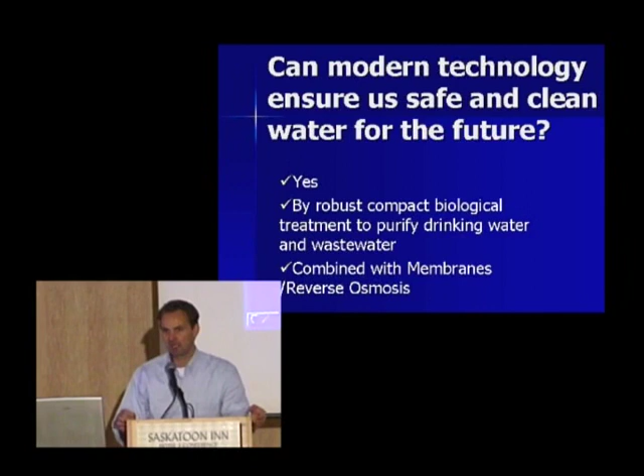A wise man in India, Mr. Gandhi, said that the truth is like a mosaic, and if you have one part of the mosaic, one part of the truth, he will be happy. No comparison at all, but if I also can give one part of the truth, I will be happy. So what is biological filtration then?

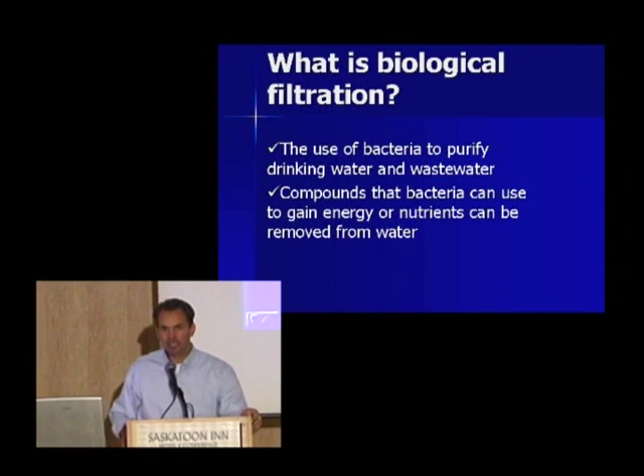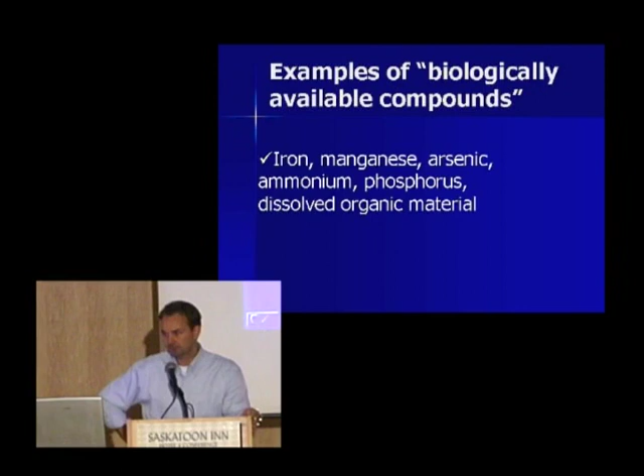Well, as you heard over the last 2 days, it's the use of bacteria to purify drinking water and also wastewater. There are compounds that the bacteria can use to gain energy, and nutrients can be removed from the water. Some examples of what you can remove biologically are iron, manganese, arsenic, ammonium, phosphorus, and dissolved organic matter.

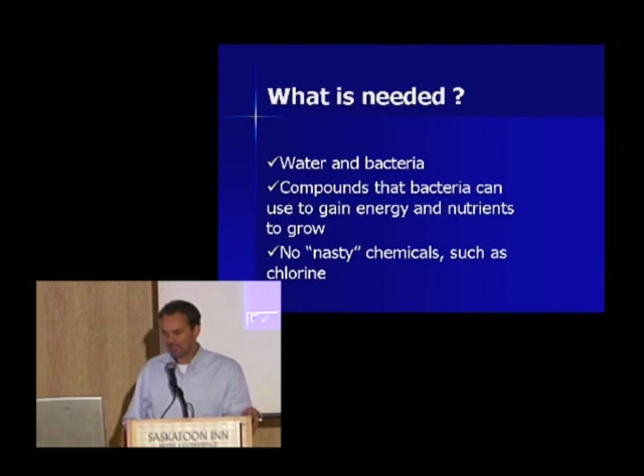What is needed then to have this biological filtration? The previous presentation, as you saw, was a bit more fancy than mine, with a lot of videos that I haven't included. Apologies for that. You need water and you need bacteria. And you also need compounds that bacteria can use to gain energy and nutrients to grow. And the idea is that you have no nasty chemicals, such as chlorine.

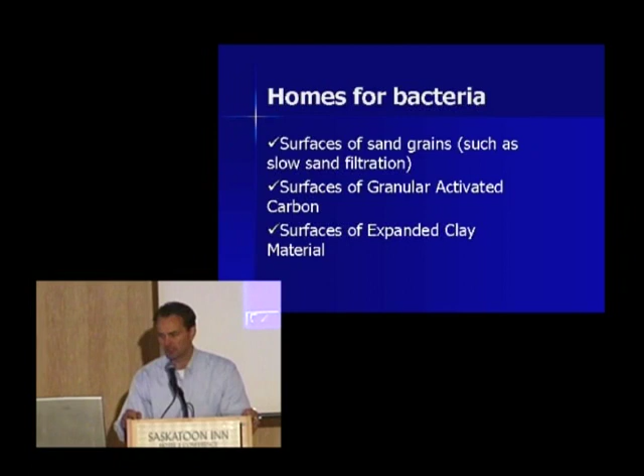What kind of stuff can you use then to make a home for bacteria? Well, you can use the surface of sand grains, as has been done for hundreds and thousands of years, which is a natural way to treat it. You can use more advanced material like granular activated carbon, or you can also use other natural material with a very high porosity to speed up the process.

What would you need then for these filter media requirements? You would definitely need a high surface area for biofilm growth so that you can squeeze your process into a smaller unit. In case you want to backwash it, you also need a high resistance to mechanical and/or chemical impacts to avoid the media falling apart, so it can have a long lifetime. If you also can recycle and reuse, that would definitely be better.

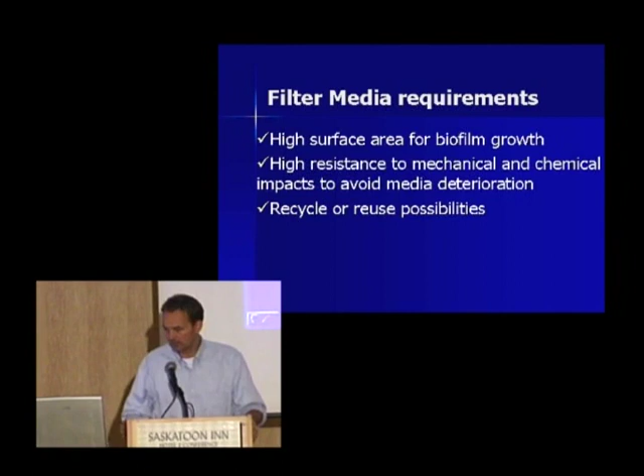So why should you use biological filtration then? Well, one of the key ideas is that you have low or no use of chemicals. You also have production of better quality water than chemical-physical water treatment methods, and from our experience, we also see low levels of failure, and it's a pretty robust, simple system, even down to temperatures of +1 degrees.

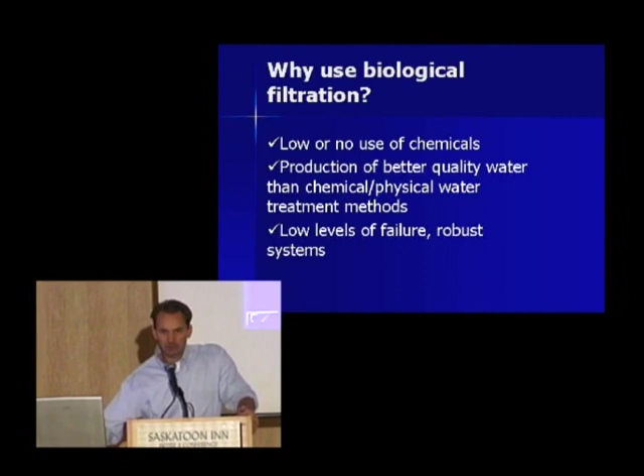You have a lower life cycle cost compared with chemical water treatment systems, and it's a so-called green technology. It's not like the green micro slime you saw, that's not why it's called green. It's a sort of sustainable technology with natural material, which also can be found locally.

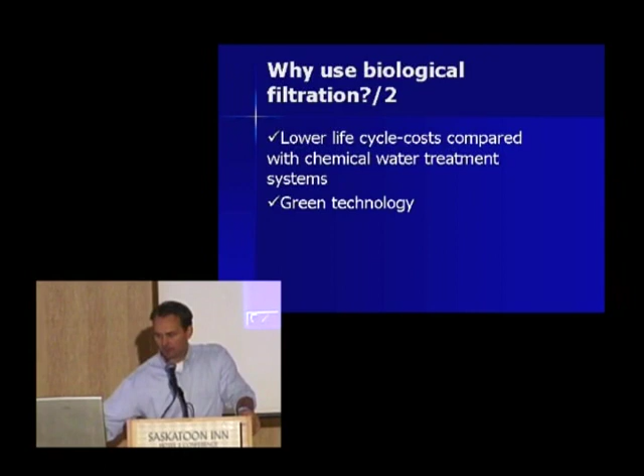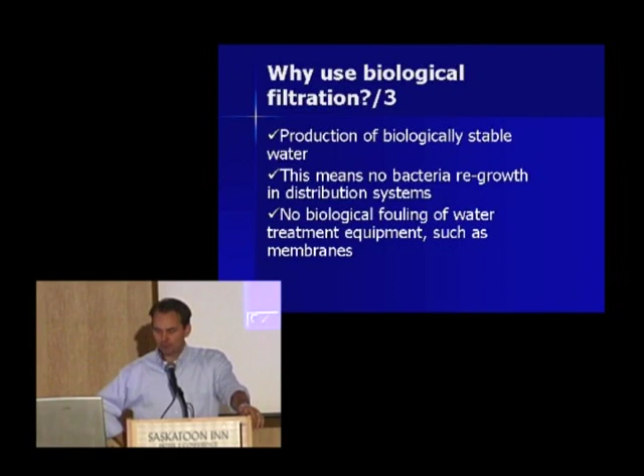So with membranes, actually the only way to destroy a membrane is to kill it. Because the membrane itself, if you feed it only with clean water, can last probably much longer than I will last. But if you really want to destroy it, you have to kill it. That means you have to push in a lot of organic material so it doesn't work.

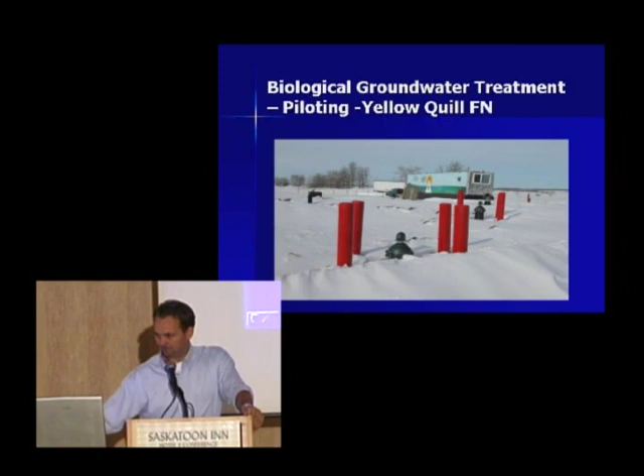This photo is familiar to some of you. I will not dwell on that. I will show you the photo of the plant. For those who haven't been there, it's a very nice, very modern, very neat plant. As soon as you enter, it's a place you like to be. And that's a good thing with a water treatment plant. It doesn't have to be a boring site that is not attractive. I think it's one of the most modern facilities I've seen in the water industry, what you have in Yellow Quill.

I heard some observations yesterday from some of the people that Dr. Peterson talked about some bugs inside that, and people don't like bugs in the water much. But if you tell those people to watch what happens to an apple core if you leave it outside on the ground, after some weeks or months you will see it slowly disappearing. It's not exactly the same thing that's happening in the biological contactor tank, but there are bacteria that are removing components that we do not want to have in the water. So if people don't get scared seeing an apple core disappear, they should not be scared to see ammonia or iron be removed from the water either.

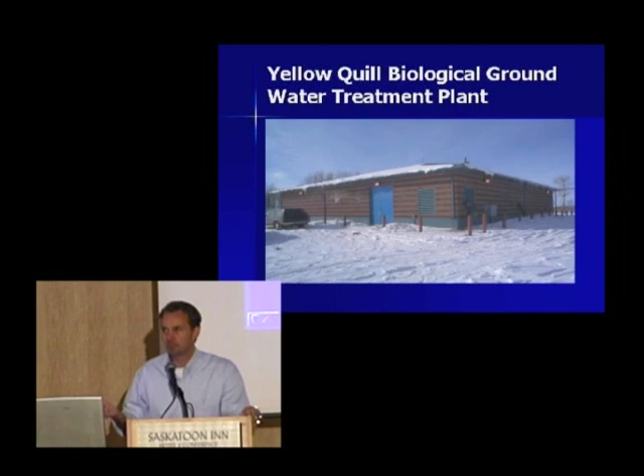Besides that, as you can see in the photo, the winters in Canada are long, as in my country. The contact time inside the biological reactor is around 30 minutes. And the oxygen consumed in that time is similar to what is happening in a Canadian lake from late November until the beginning of March. The oxygen consumed in a 100-day period is similar to what's happening in the contact reactor in 30 minutes. That means the process is around 5,000 times faster, to give an idea of how compact it is. It's an integrated plant. Some of these photos you have seen in earlier presentations, so I will just pass through.

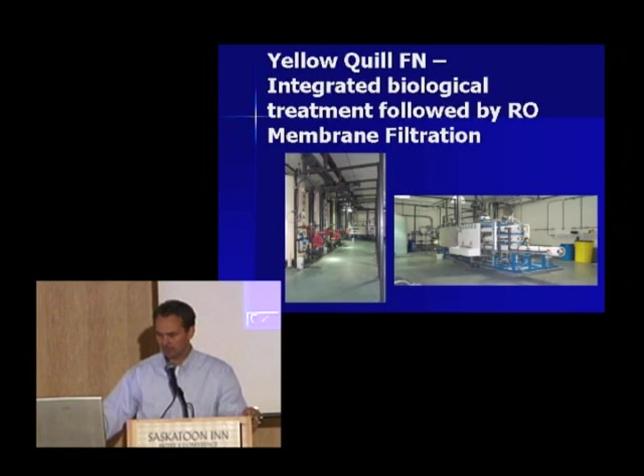The biological filtration alone is called a secondary filtration. It's not the solution. It never claims to be the solution, but it could probably be a part of the total solution. So what can be removed in the biological part is that you can have a high reduction of iron. You can also have a high reduction of arsenic. All the bioavailable organic material could be removed. And you will also have a pretty good oxidation of ammonia to nitrate, which I know is a problem in many First Nation plants, that you have a high level of ammonia. And you can also have a significant reduction in particles.

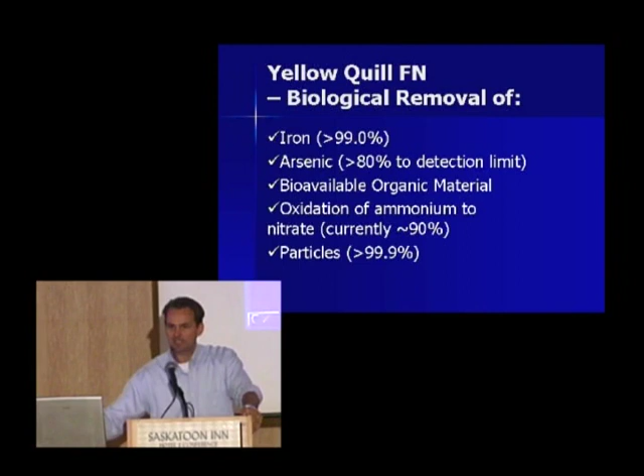Well, it's like a horse and a wagon: the biological part combined with a membrane. If you want to carry a lot of load, using both the horse and the wagon, you can carry much more load than if you only use a horse or only a wagon. So supported by the membranes,

after a biological treatment, you can remove almost all the elements that are in the water. You can have a very good reduction of TDS, sulfates, non-biodegradable organic material, manganese, and alkalinity. You could also remove the manganese in the biological treatment, but the way the process is set up in Yellow Quill, it is preferred to remove the manganese in the membrane rather than in the biological treatment. Because to remove the manganese, you have to take away all the ammonia before you start to do that.

The very fascinating plant at Yellow Quill is very nice. It's very new in its size, that it's treating groundwater, and it's the first in Canada. But there still are some other treatment plants around the world. This is in the heart of Paris, which has been operated since 1997, and it supplies drinking water to the city of Paris.

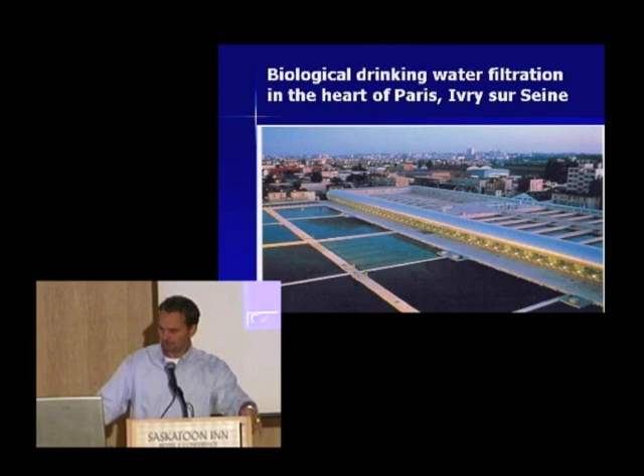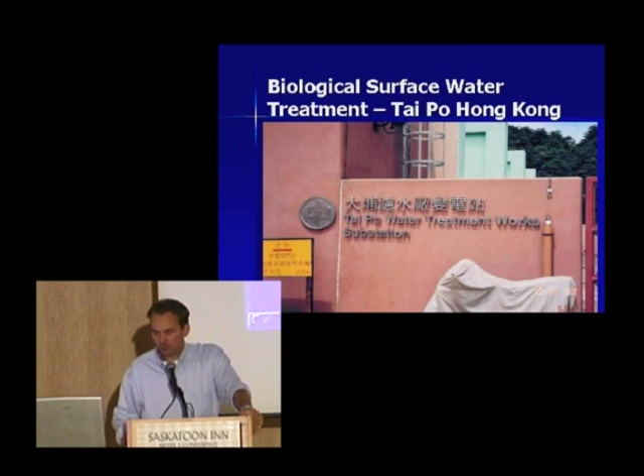Another drinking water treatment plant is supplying 20% of the population in Hong Kong, and that is a pretty huge plant. They had very severe problems with ammonia because the technique they used was chlorine, with breakpoint chlorination. So with the existing technique they required approximately 35,000 kilos of chlorine every day. And that's a lot of hazardous stuff to transport in one of the most densely populated cities in the world. So they were happy to go on with biological treatment as a key element to remove ammonia.

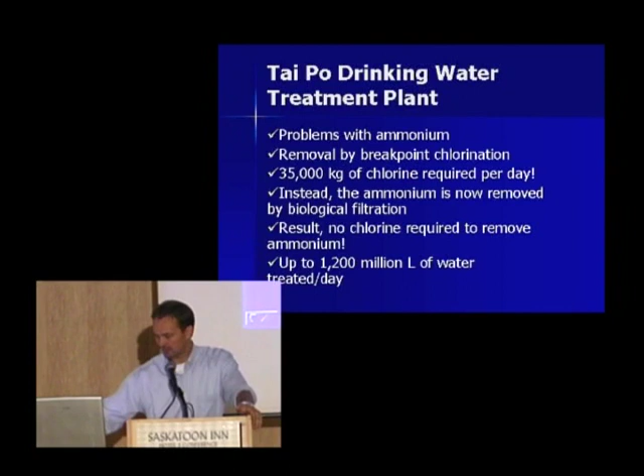They have hardly any chlorine used compared to the initial volume. And this plant is extended to be around 1,200 million liters of water per day. So that's a very, very big plant. So the Jellicoe plant is new, but there are other plants that have shown that this technology could also work elsewhere.

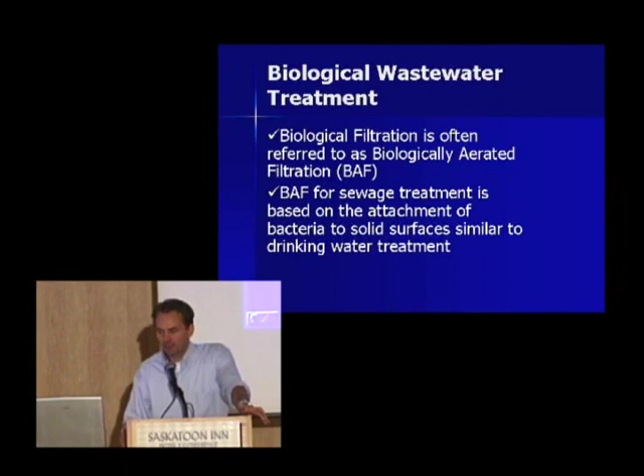Biological filtration is also referred to as biological aerated filtration. That means there's a filtration going on, and it's a biological process supported by oxygen. It's also used for sewage treatment, and it's based on the same principle, that you have attachment of the bacteria to the solid surface, similar to what we have seen in drinking water.

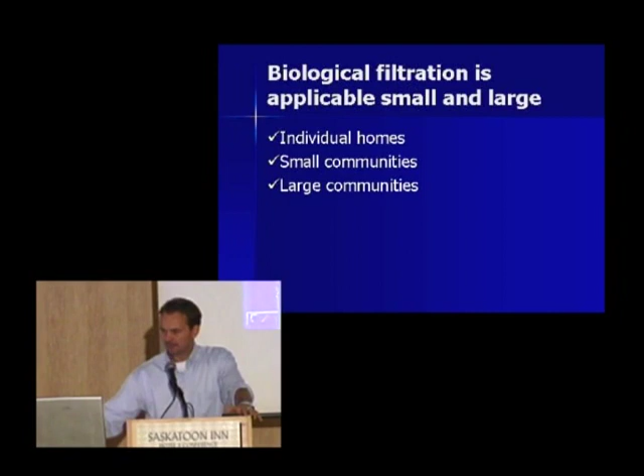So where can you apply biological filtration? Well, you could apply it anywhere that you have water to treat, water coming in and water coming out. You can use it for individual homes, for small communities or clusters, or for large communities. This could be a house in a typical First Nation in Canada. The photo is from Norway though, but you could probably have a similar thing here.

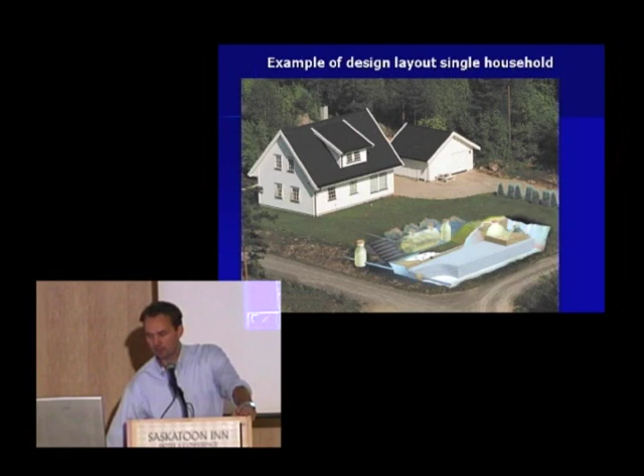What you see here is the septic tank, which is always required. And then you have a pump that is pumping material into a biological pre-filter unit. And then you have a filter bed for final polishing. And if you want to ensure the quality is good, you can have an inspection well here. If you don't want to ensure the quality, you skip the well, but you have no idea what's coming out.

So the filter bed itself is called a subsurface horizontal filter bed. It's designed that way because normally filtration will be vertical. In this case, you try to have a horizontal flow to have extended treatment. The first part here in the upper right corner would be the pre-filter unit, where the intermittent dosing of the feed is also very important.

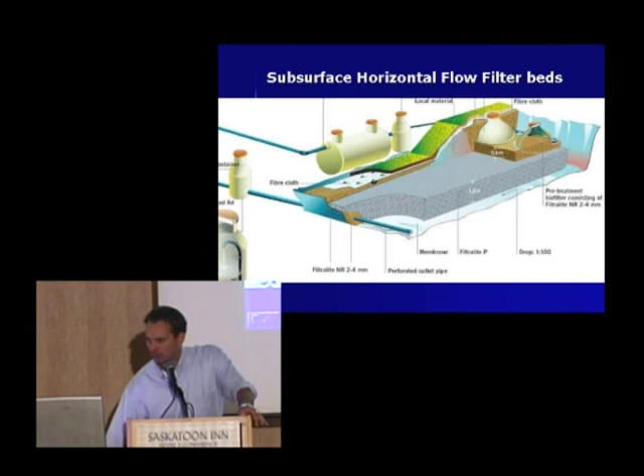When you go back to this, you can see a lot of small house community plants with biological filtration tanks around 100 gallons, 150 to 200 gallons. Those plants, like what Dr. Suzuki told about, have no extra storage. They're not designed for any birthday parties, any weddings. So imagine if you have a 15 or 20 person load going into a 100-gallon tank; you can think about the treatment result you're going to achieve from that. If you make a filter bed like that, of course you will have much more enhanced treatment.

And also you can pack in the system, so it's an invisible system. Most people don't want a treatment system in their backyard full of reeds and stuff, so this is a pretty neat solution where you can just dig the system into the ground. And as you see here, you can use a pump for irrigation. Normally the quality coming out of these systems is up to bathing water standards.

There was a conference by the Agricultural Engineering Society in California in March, and there was a survey presented from the United States telling that 50% of the persons with a local septic tank system had absolutely no idea what happened to their water after they pull the chain. No idea what's going on. And I don't know the situation in Canada, but I guess there's a lot of people out there having a septic tank system that have no idea what happens to the water after they pull the chain.

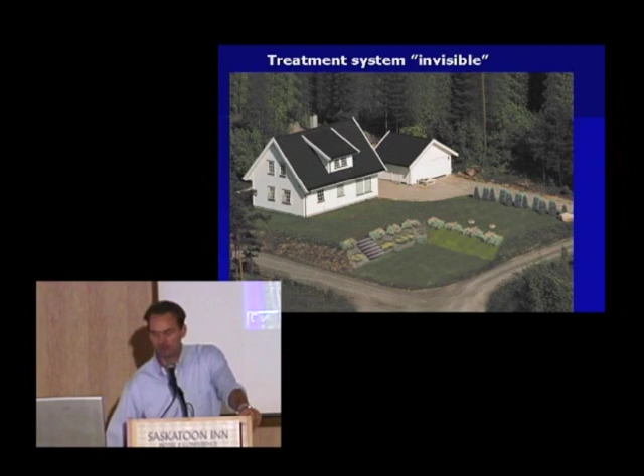You could have a lot of contamination of on-site groundwater, like I mentioned, with septic tanks or shoot-outs, with poor treatment of waste and high risk of well contamination. If your septic tank is never emptied, well, there's a chance that you have some leakage coming out of that. The biological treatment, though, offers a better removal of disease-causing microbes, but you also have separation of gray water and black water, may be best with the gray water treated biologically.

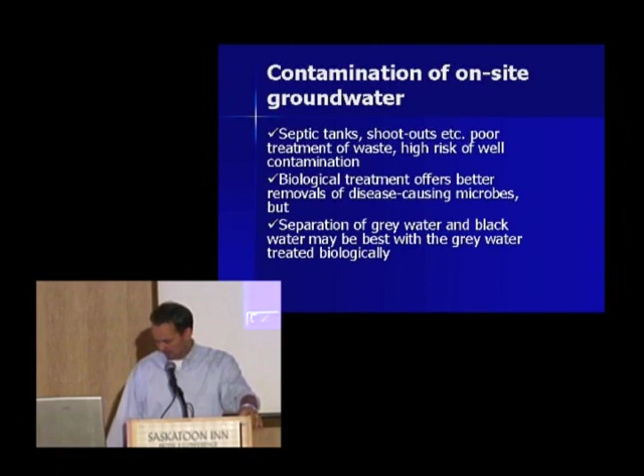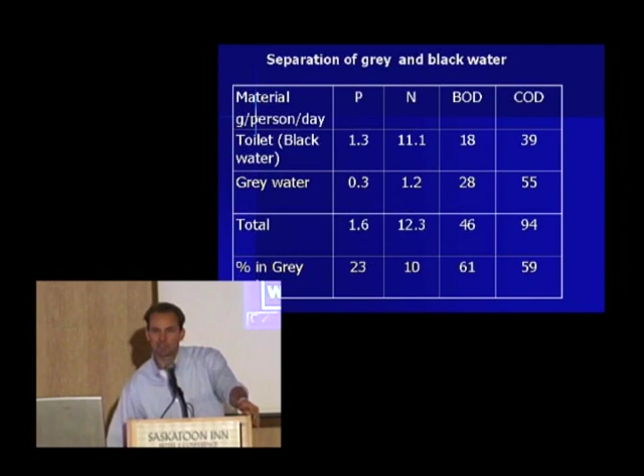You can see that from a phosphorus point of view, you're only 23% in the gray water. For those of you not familiar with gray water, it is the water coming out from the sink, from the washroom, from the shower, and you separate that from the toilet. So what is coming out from the washing machine and the shower would be 23% of the phosphorus, 10% of the nitrogenous matter, 61% of the BOD, and roughly 60% of the COD. So that means if you're able to treat that separately, you have a totally different story when it comes to the treatment.

So the question is, are there possibilities to avoid black toilet water? Well, there is an emerging race of new types of toilets based on composting, with no water or limited water used. This is now a proven technology with millions of installations worldwide. And I will show you an example of a place called Ecovillage in Norway. And the question is, is this the solution for rural Canada? Consider many rural wells grossly contaminated from on-site sewage treatment.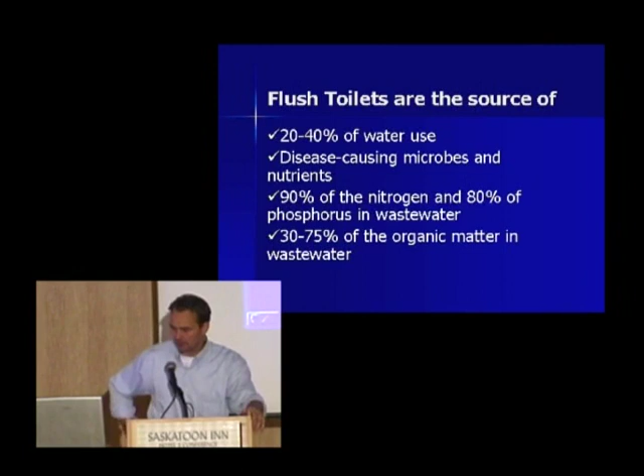So flush toilets are a source of around 20 to 40% of the water use. Disease-causing microbes and nutrients: you have 90% of the nitrogen and 80% of the phosphorus in the wastewater, and approximately between 30 and 75% of the organic matter in the wastewater.

Well, contamination of your own well is easy. From a report from the CDC, we have found that most disease outbreaks, 64%, are caused by untreated groundwater from private wells. A considerable percentage of rural Canada as well is affected by wastewater contamination. And treating water that has been tainted by wastewater is extremely difficult. So maybe some new thinking is required.

There's a municipality in Sweden called Tannum. They have forbidden flush toilets due to the damage they're doing to the local community. And 20 years ago, there were like 300,000 composting toilets installed in Scandinavia; it's likely that at this time there are around 1 million. Disease-causing microbes are kept out of drinking water sources, and water use is decreased, of course.

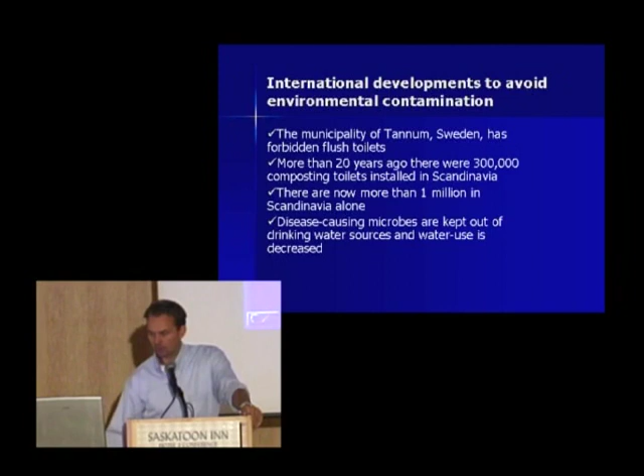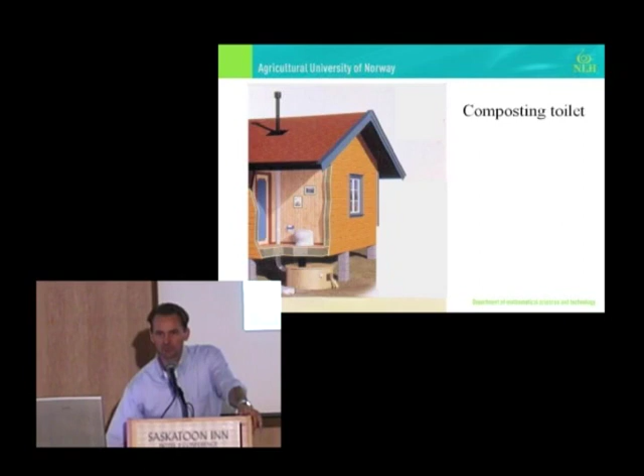How to use the biological compost toilet: you can put it nicely and neatly inside the house like this, and this is also a photo. I'm not sure if you can see it very well. The toilets are up here, and the tanks for the composting are down here in this section. And it was selected the best roadside facility in Sweden in 2002.

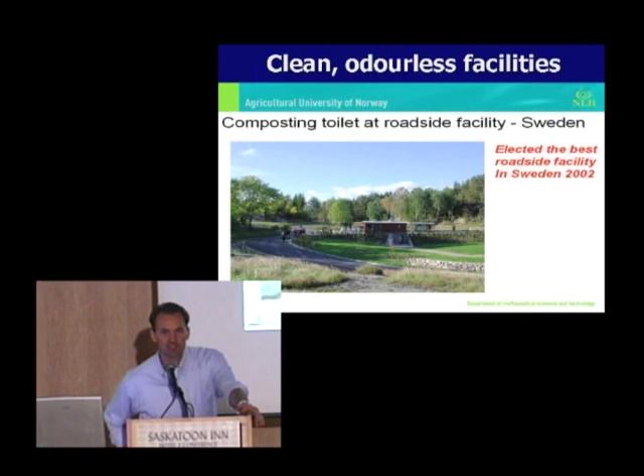Well, as you can see, the first three toilets are available commercially. You can have composting dry sanitation, which hardly uses any water at all. You can have a more sophisticated device separating the urine from the rest, and they can use that as a fertilizer for agricultural purposes, mixing it with the manure.

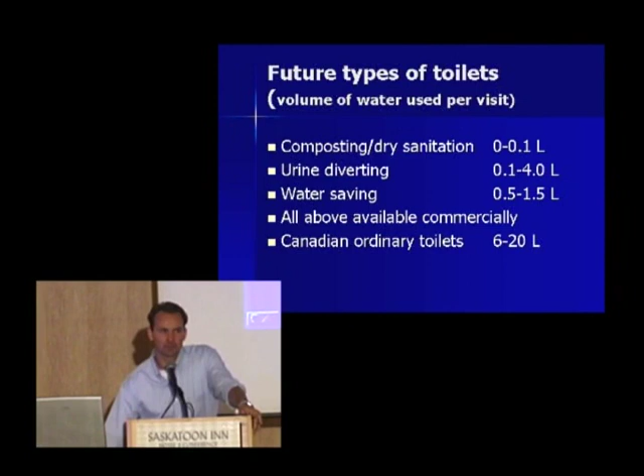And you can have water-saving toilets with a half liter to 1.5 liters per use. As a Canadian, an ordinary toilet could be between 6 and, in the worst case, up to 20 liters per visit. Seeing these figures, you can, of course, easily figure out that there's a huge quantity of water to save that doesn't have to be treated.

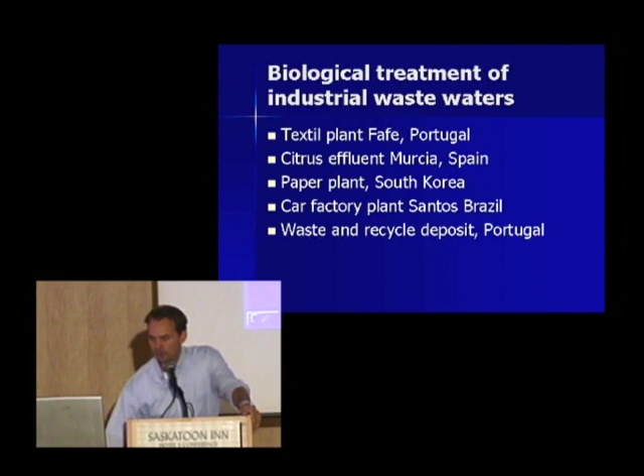So for larger sewage treatment facilities, different processes are available. Commonly used are processes including various types of lagoons, typically producing effluents of inconsistent quality. The activated sludge is often used in large facilities. Meanwhile, biological filtration treatment is a rapidly advancing technology for efficient wastewater treatment.

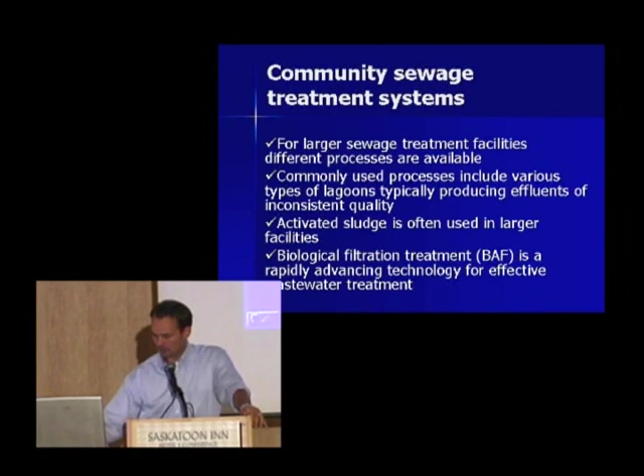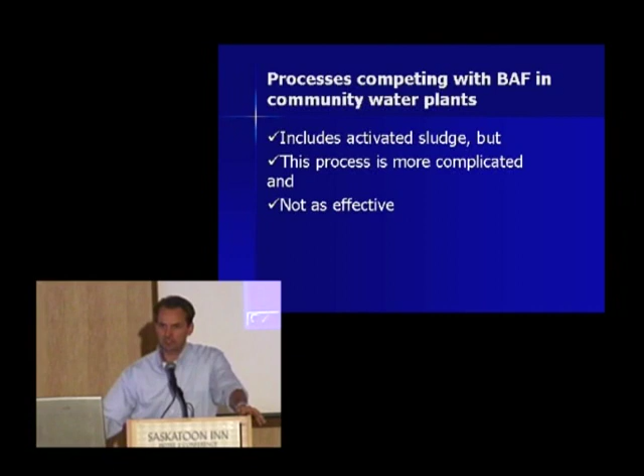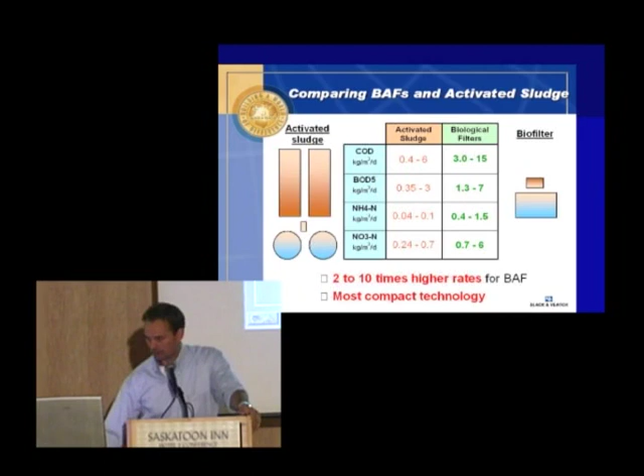On the other hand, you can also see the treatment results for COD, BOD, ammonia, and nitrate are far, far better than for the activated sludge, including a great saving in land cost and in size. So it's a much more compact technology. One of the strongest points, of course, is it's also environmentally friendly. You have very little odor coming out from the plants, the footprints are very small, and you can build nice, neat plants like this from Switzerland; they like to build them up in the ski resorts in Switzerland.

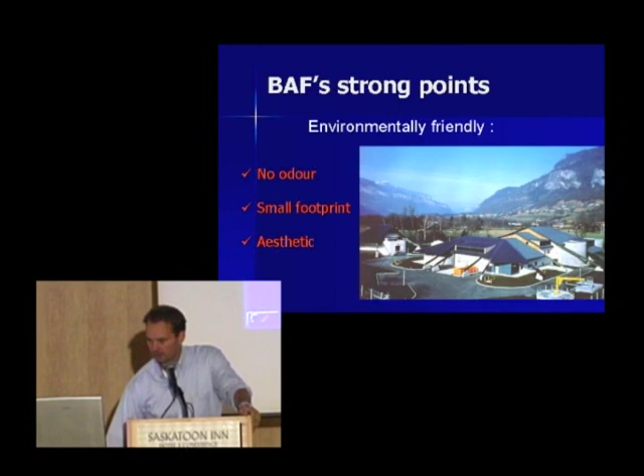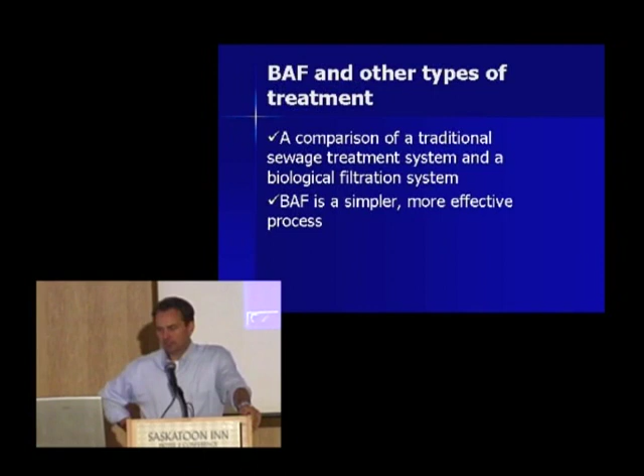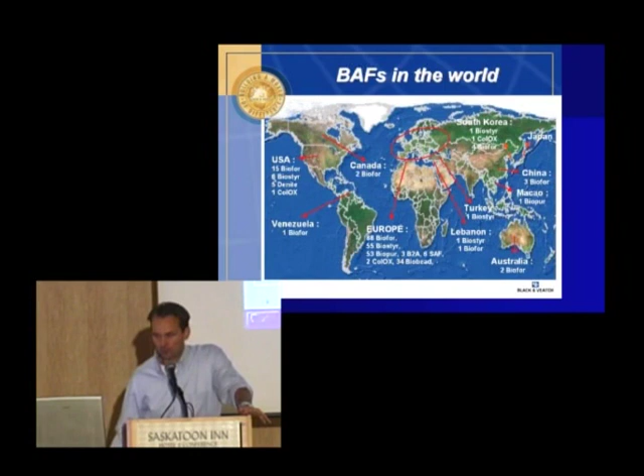If you compare to other systems, a comparison of traditional sewage treatment and biological filter treatment systems, the biological system is a simpler and more efficient process. This slide is from some years ago, though. So it just shows you that this kind of treatment process is pretty much extended all over the world. I put up a small list of the biggest plants.

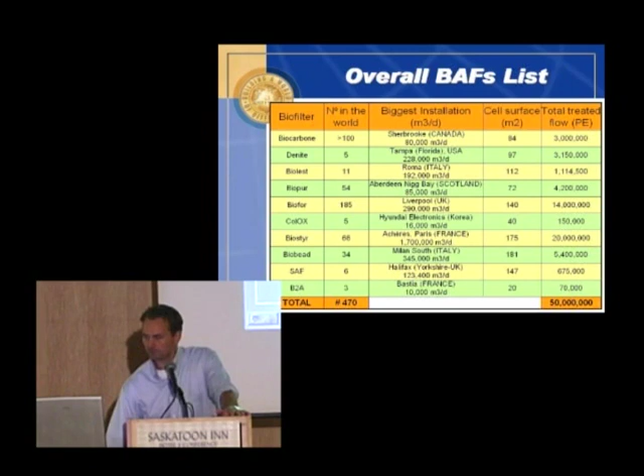Very shortly, telling you about the configuration of a BAF. This is a more technical part. You can run them in different modes, upflow mode or downflow mode. You will have the filter media in the center, and you will need some process air and scour air to backwash it. The important thing here is, of course, the media that carries the biofilm,

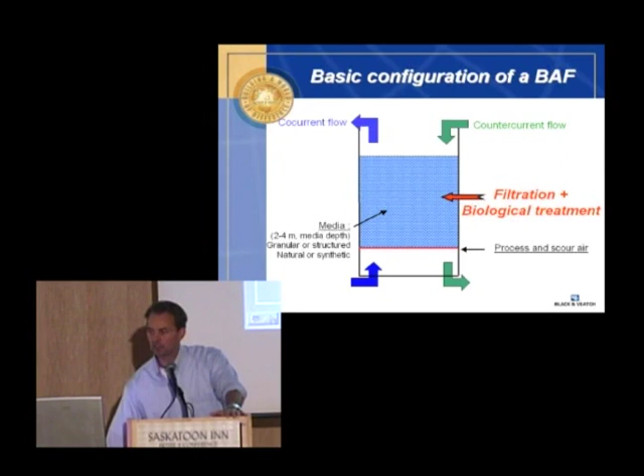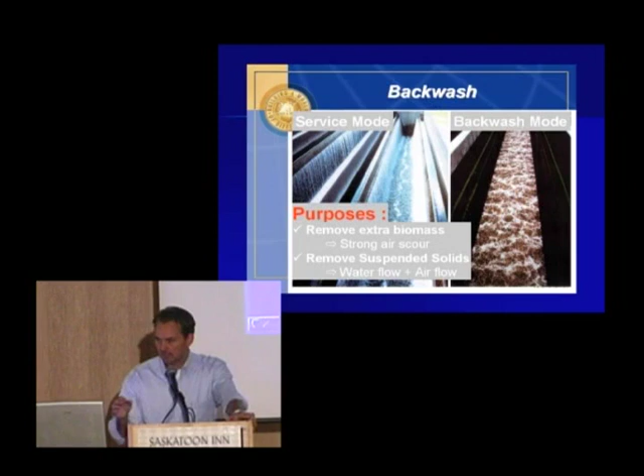and another important thing is the biofilm. As you saw from the very nice video in the previous presentation, these bugs grow very fast. And if you don't backwash them, they will just become a huge lump of bugs that will clog your system. So you need to backwash those systems for sewage treatment. A typical backwashing interval will be 20 to 24 hours. As for drinking water, you can run your plant for weeks without backwashing because, of course, the organic load is far, far less. But the backwashing is the important part of that.

You can run it downflow. For the BAF technology, you can run them upflow. With the sunken media, you can use them upflow. With buoyant media, you can use open structure media, multi-layer media, biofiltration, or moving bed. Sounds a bit complex though, so I don't want to get too much into it, just to mention that the technology is there. It has been proven in several kinds of treatment plants.

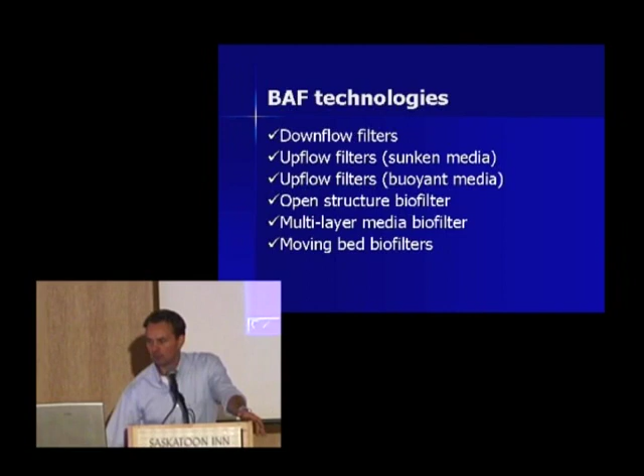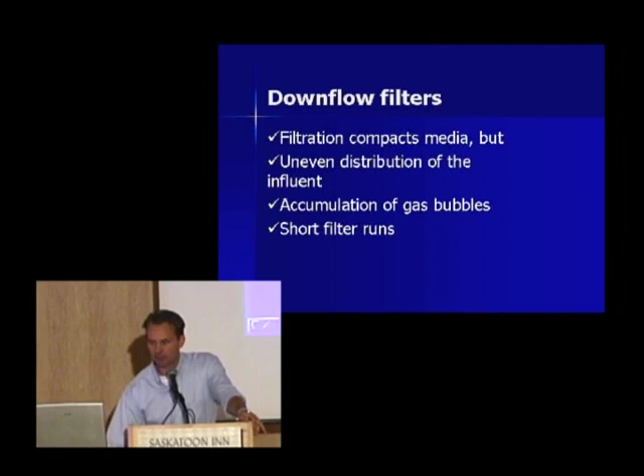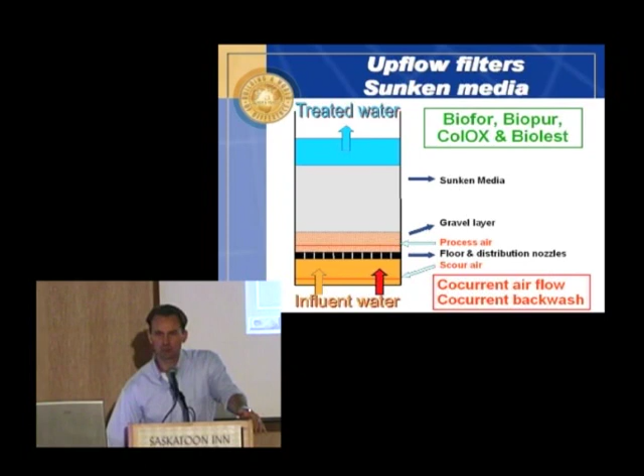Starting with the downflow filters, you have filtration with the compact media, but you have a more uneven distribution of the influent. You will also have maybe a sort of accumulation of gas bubbles and shorter filter runs in a downflow mode. If you run it in upflow mode, you will have the inlet water coming in from the bottom, passing through a false floor. You will also provide process air and scour air flowing in this direction. The good thing is the treated water is up here on this side, so the odor is gone when you have the inflow in the bottom.

You have a more even distribution of water and air. You have a lower head loss development. You have a high velocity. You can run them up to 35 meters per hour, which is a pretty high load compared to an activated sludge plant. And filtration would expand the media, which is not so good, and you will have also co-current backwash though.

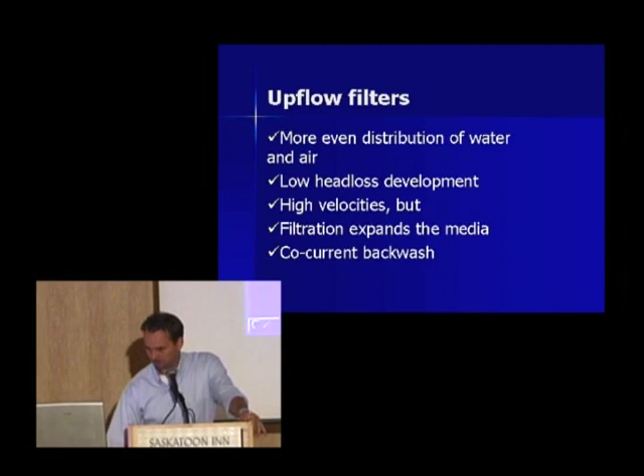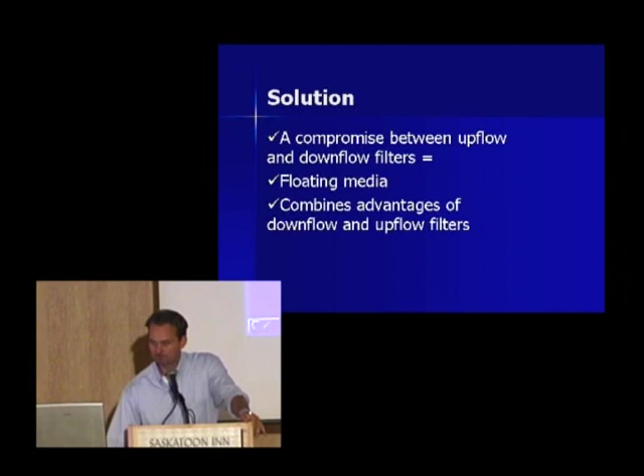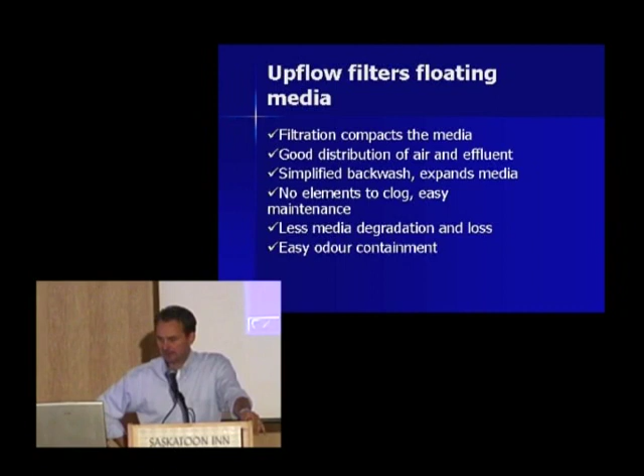Well, the solution is something in between the upflow and the downflow. So it's a compromise between those two, but you have a floating media. You can combine the advantages of downflow and upflow. And you will have a filtration that compacts the media. You will have a good distribution of air and effluent. You will simplify the backwash, expand the media. You get no elements to clog, and easy maintenance. And you would get less media degradation loss and easy odor containment.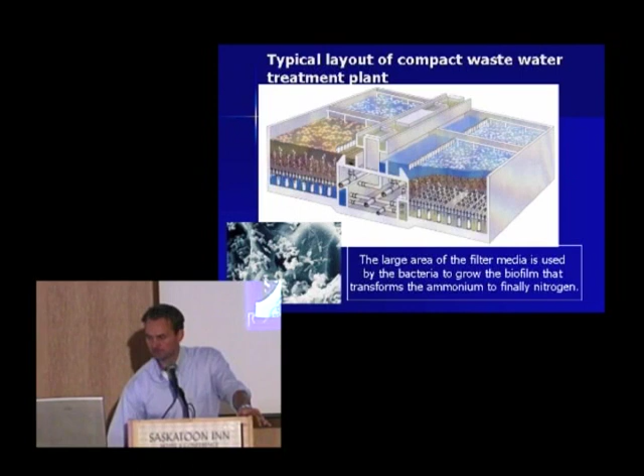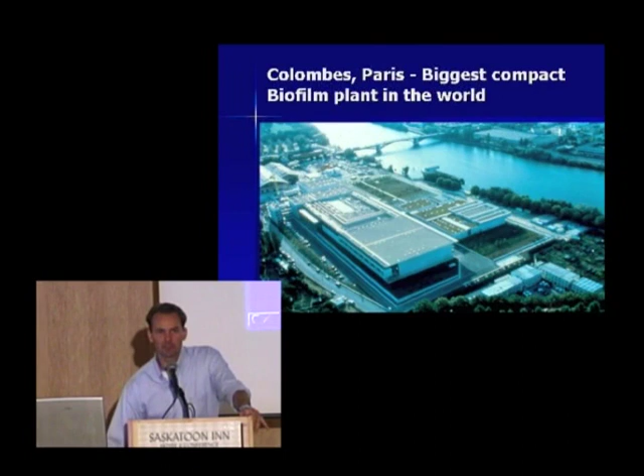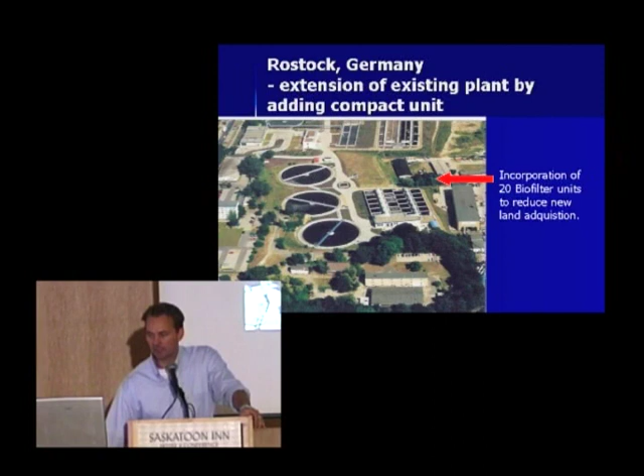I'll just finish with showing you some photos of some bigger plants. This is from Colombes. This is one of the biggest plants. It's the biggest biofilm plant in the world. It's in Paris, and it's for sewage treatment, though. Here you can see the biofilter plant representing a pretty small area compared to the old existing plants. So biological filtration is also something that you can easily fit into any kind of other treatment plant as a tertiary treatment. If you want to upgrade an existing plant, you can just add on a small unit in the end, or some smaller units to make your plant perform better.

Well, going back to the statement I said in the beginning, I think that biological treatment of drinking water and many types of wastewater can improve the quality of the water with minimum use of chemicals. And that is the key thing, to reduce the quantity of chemicals that you really don't want to use to contaminate the environment. You can also learn how to adapt biological processes. Sustainable lower cost water purification solutions with minimum environmental impact may be achieved for all.

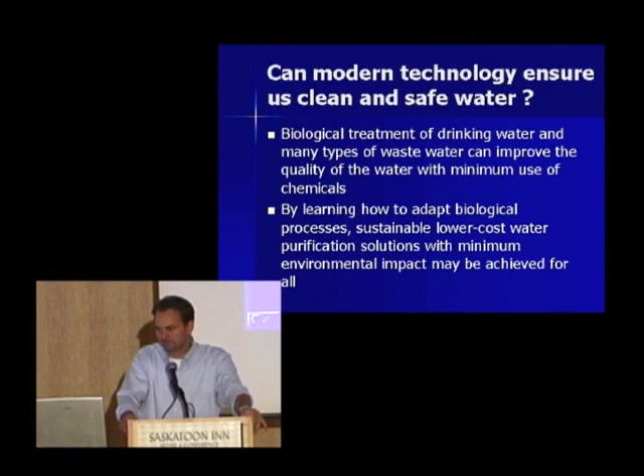So I will finish with this one, and I will bring it all back to you, when you come back there, to bring the message to all the people living in your community, to tell them all that if we leave the water in the same conditions that you found it, it will be the best for them and the best for the whole community. And you can even find the water in a condition and turn it into even better conditions.